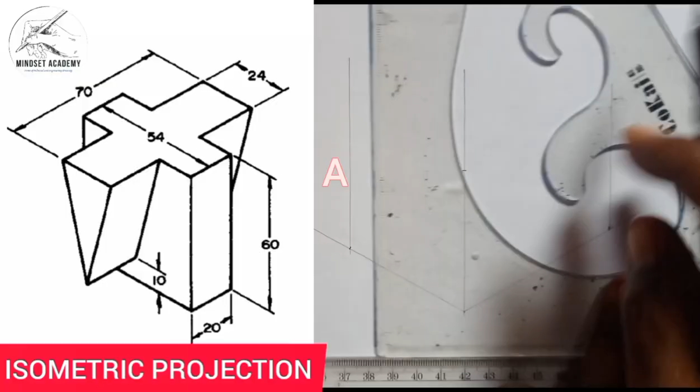You're welcome to my channel, Mindset Academy, where we want to reproduce a figure that is displayed at the left hand side of the screen in isometric projection.

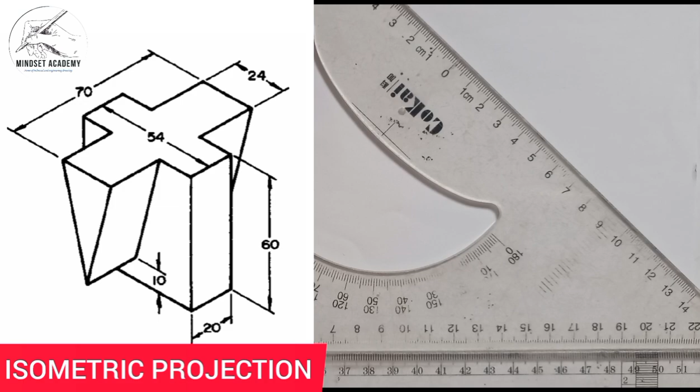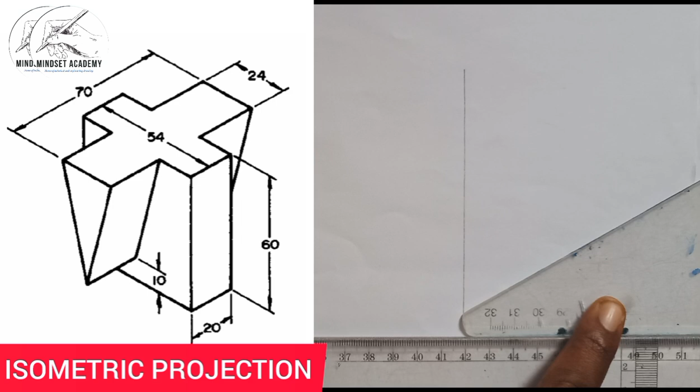The first thing you do when you hear the word isometric projection is for you to draw your isometric axis. That is, drawing your y-axis this way, representing the vertical, and drawing the x-axis this way, or the horizontal axis that will represent the x and the z-axis.

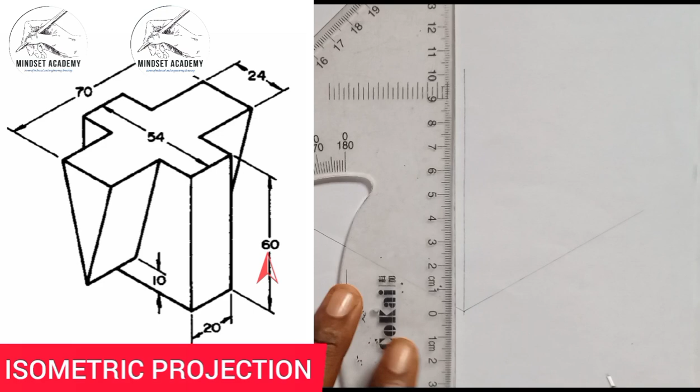You can see that. Now, if you look at this, the entire height here is 60, as you can see here. So I am going to measure the height along the y-axis from 0 here to 60. Alright, then the width here is given to be what? 54. That is what you're seeing from the two ends here. So I'll measure 54.

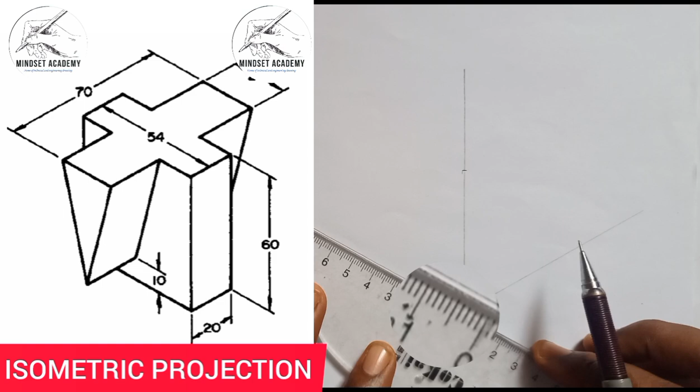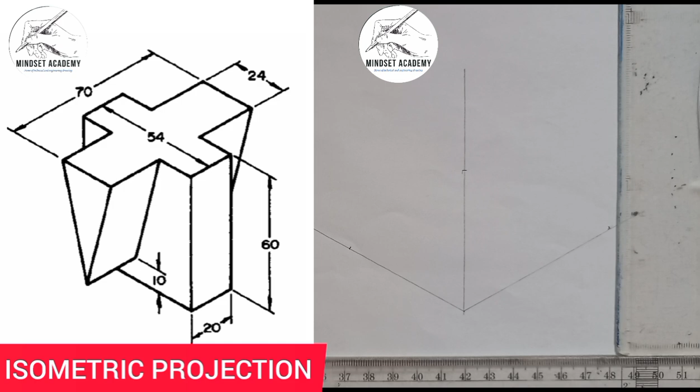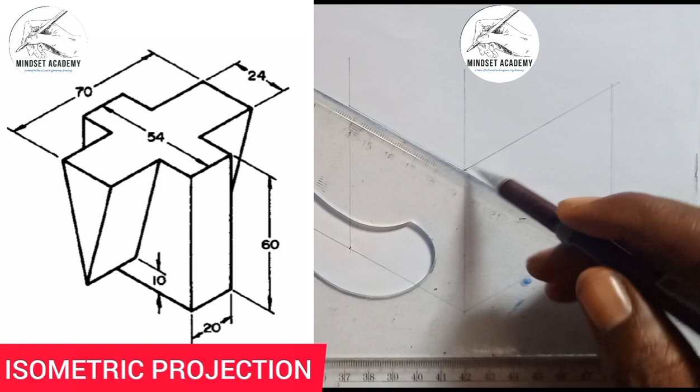Then the other length here is 70. You can see from this point to this point is 70. Can you see that? And I am going to project those points up to get my figure in this fashion. So you do this, and you also do this, and you come here too, and you also do this. Hope you can see that. So I can easily bring this down so we have a clearer view of it. Then I will increase the thickness. Hope you can see that.

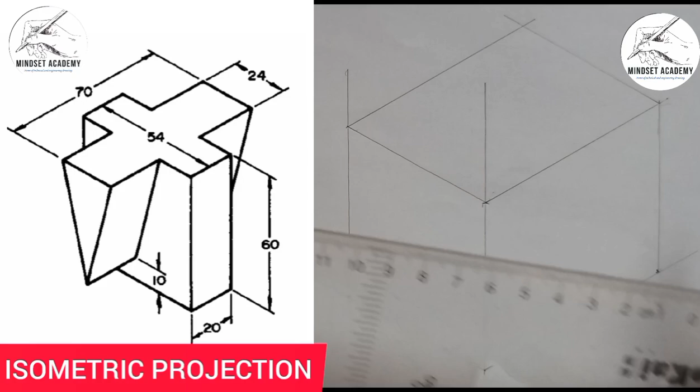Now aside that, the next thing you do is you get the center of this figure, which is very important. Get the center of this shape here, right? And the easiest way to get the center of that shape is to join the diagonals. So if I join from here to here, I'll get somewhere around here. And I'll join from here to here, meaning that this point to this point, this is the center here. So this is where they are meeting. Where they meet, that will be the bull's eye. That will be the center of that figure.

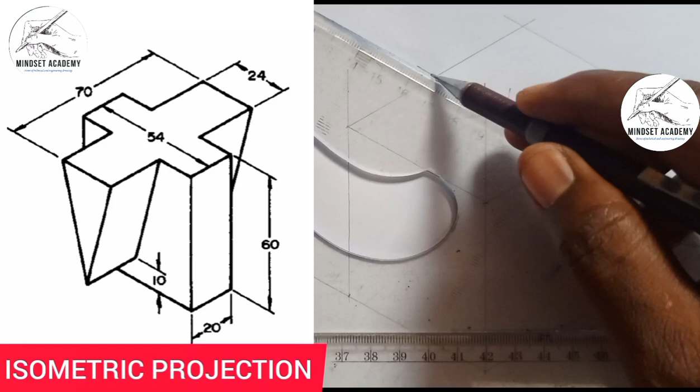So I'm going to just draw my line this way. I will touch here this way. And I'll come here also this way. I'll touch here this way. Can you see that? Now the thickness of this point here you see is 24. That is from here to here 24. Similarly from here to here also 24. So I'll measure half of it. From this center here I'll measure 12 to the left, 12 to the right. Also here too I'll measure 12 to the left, 12 to the right. That's what I'm going to do.

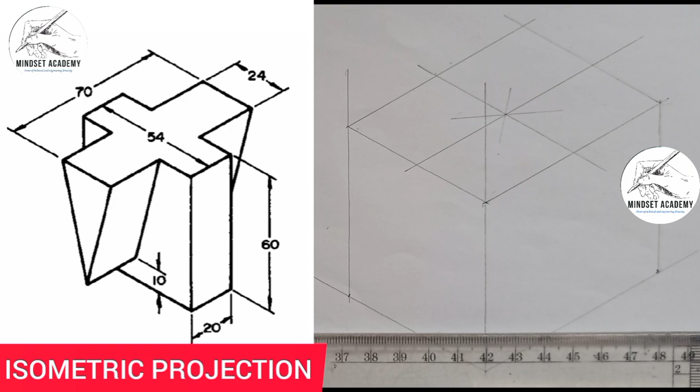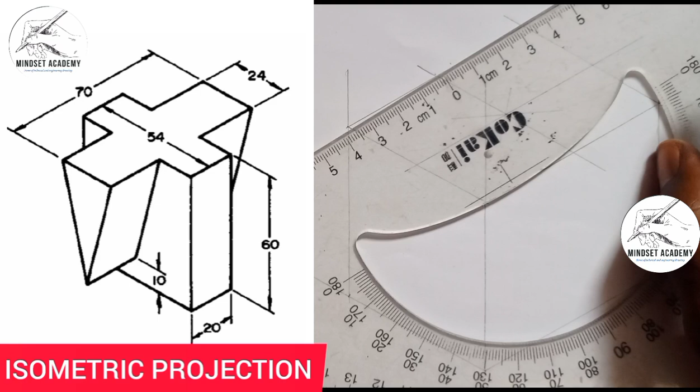So I'm going to use my compass, right? It will be better that way and faster. Or I'll just use my instrument, my rule here. When I place it this way, from 0, can you see that? So if I measure 12 here, I'll also measure 12 here. Hope you can see that. I'll come here too. I'll do the same thing here. From 0, I'll measure 12 here. This is 12 here. I'll also measure 12 here. This is where they are meeting, these 2 points.

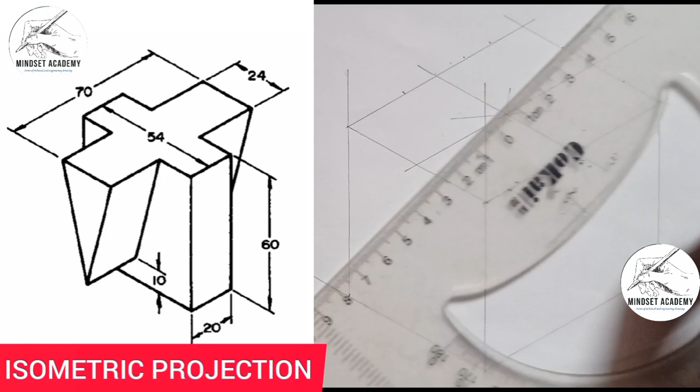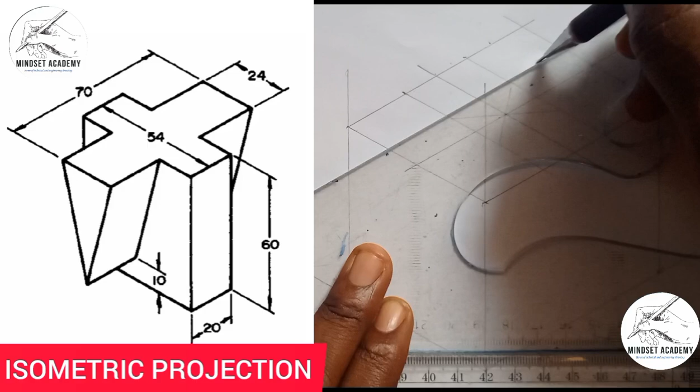So once I have done that, I'll now take my rule. I'll just draw my line from here straight down here, from this point also straight down here, and I'll come here too. From this point I marked, draw my line. I am going to end here. Also from here I'll end here. I'll come here too. I'll do the same thing from here. I'm going to end here, and from this point too I'm going to end here.

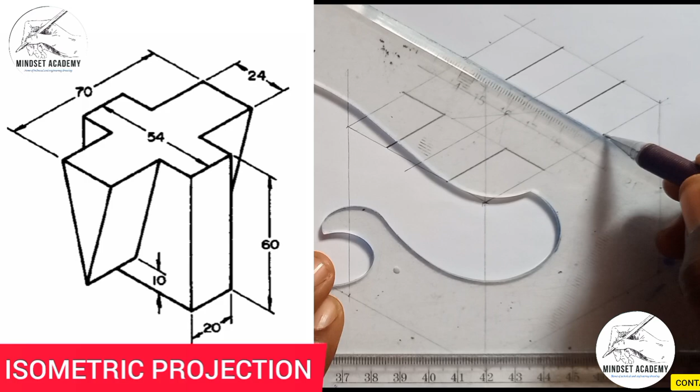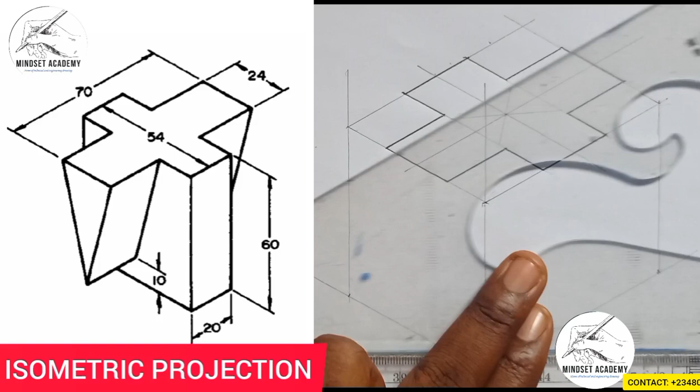Can you see that? Then I will draw my line from here to touch here, and from here to touch here. I'll come here too, draw my line to touch here, from here to touch here, and I'll close here up too, as you can see on the screen. And I'll come here also, I'll close it up at this point here. Can you see that? And also I am going to close this point too, and I'll come here too, I'll close this point too. So that is the top there, you can see. Now similarly the other one is coming down from here, straight down from here to here. So this is coming from this point straight down, and this is coming from this point straight down.

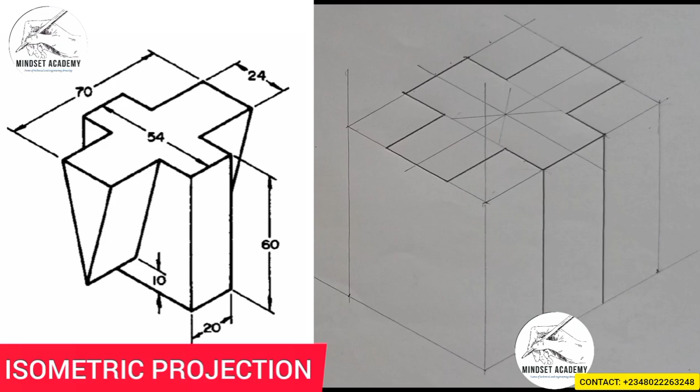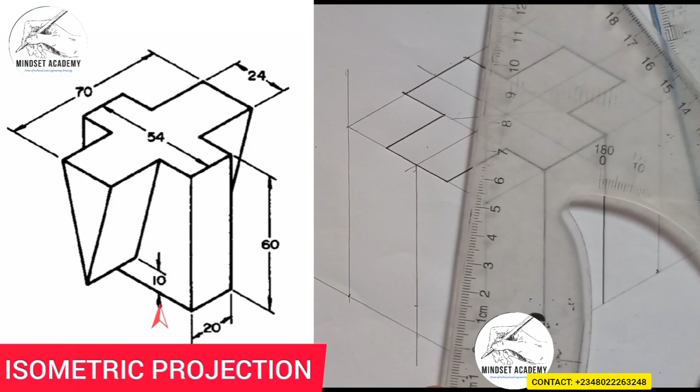Right, now the next thing I'm going to do is I'll project this point here. I'll project it down the center line, faint line first, where my arrow is pointing, then a height of 10 upward. This 10 you see, so I'm going to measure 10 upward. So from 0 up to 10, this is where it reaches. Right, so I'll just simply take my line from here to come and touch that 10. Can you see that? I'll also come here too, quickly take my line from here to come and touch here. Now I'm going to take that point straight back this way.

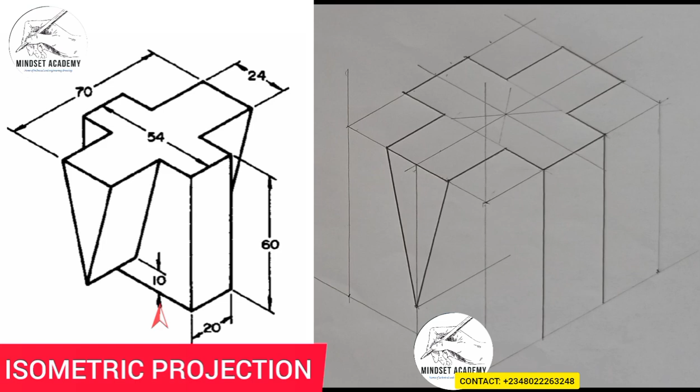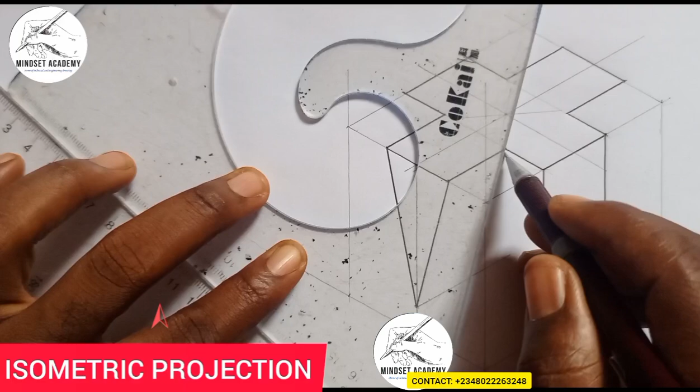Right, now once you place your instrument here this way, you can just from here place another instrument at the back here, just like using your line division to draw parallel lines, and you move this to that point to come and touch here. And you close here up. So once you've done that, place your instrument here and you move it here. Draw a line that will come to touch here. And you close here too.

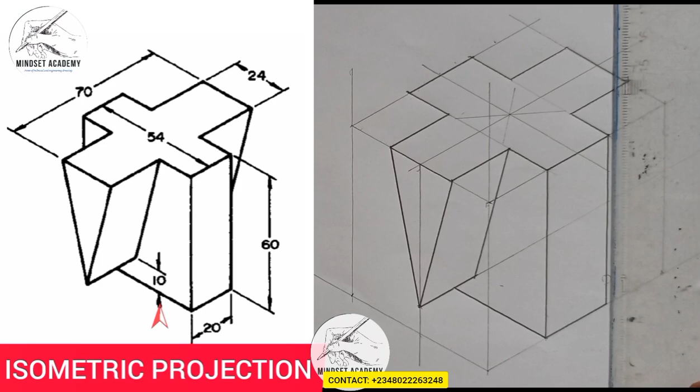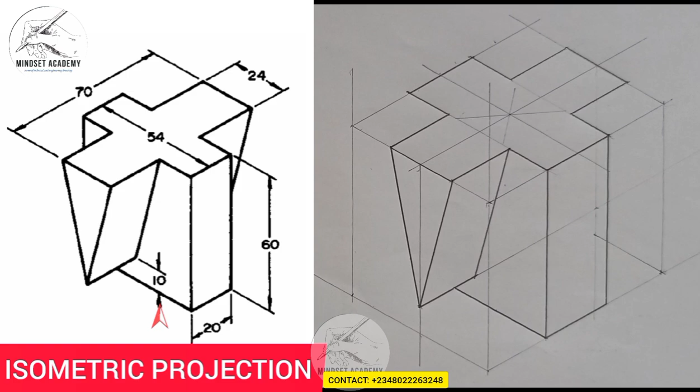Then project this center line downward. And also project this point here. So from that point you measure 10 millimeters upward. Let me start from 0 here to 10, just stopping here. That is where I will draw my line to. But I will just stop here. I will not come here because the figure is solid. At this end here, I'll just take here down, straight ahead.

So we have successfully produced the figure that is displayed at the left hand side of the screen in isometric projection.